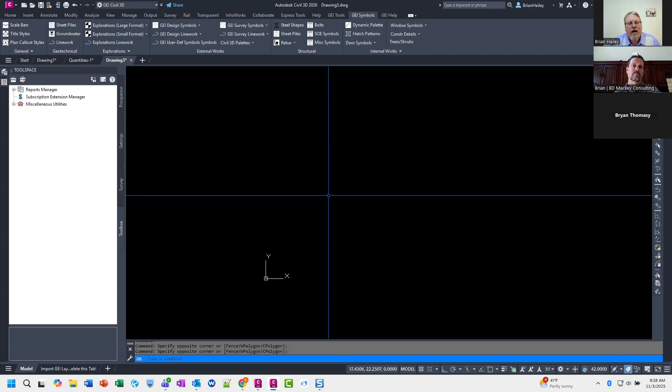If I go into my options, this is just a normal drawing, you can see we have our support files. If I come into this drawing here, which is associated with a project up in ACC, a cloud-based project, it's just a copy of one of the tutorial files I put up in a project. If I go into my options here, you'll notice this current drawing is using project-aware settings. So what this does is say, no, I don't want to use those settings from your base CAD, I want to use these settings instead.

You can see there's support file search paths, trusted locations, templates, tool palettes, and authoring palette file locations. So if you have a project that needs specific things, you can put those into this location. Brian and I were just going over this together last week or the week before, and I don't like it. Well, for us here at GEI, I don't like it, and I'll explain why. I think it's a great idea, but I'll talk about some issues I have with it.

If I come down here, you can see those classic AutoCAD settings. These are the settings you have just from regular AutoCAD, and these are the project-specific settings. I'll show you how to set this up for a project if you want, and I'll also show you how to get rid of it for a project you don't want it in, if you accidentally set it up.

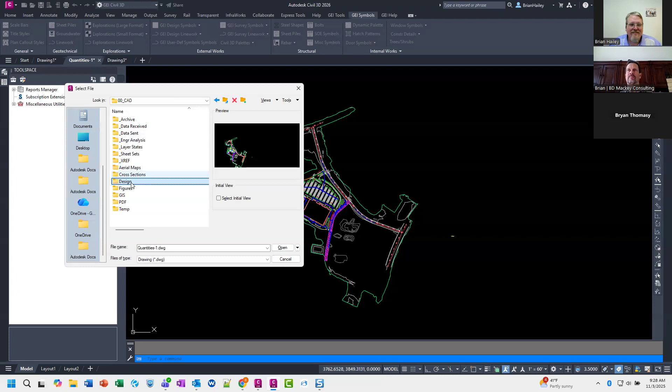That's why there's three Brians, because we will never have a full disagreement, right? It'll always be 2 against 1 in our brains.

So this particular project does not have the project aware settings, at least I don't think it does. This is the first time I've actually gotten into this one. But if we go into our options here, you can see project settings are available for this. And you will only see this option if the file is saved up in ACC.

All right, so if I come back over to this drawing, which is just drawing number 3, and I go into my options, you'll see that that is not available here. So that's why I'm thinking the files have to be up in ACC. But I'm not 100% positive.

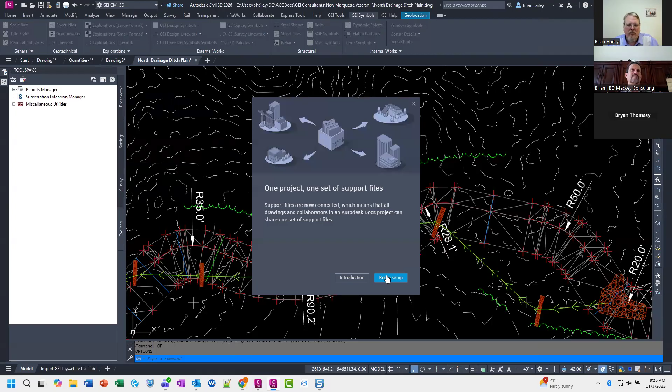All right. So I'm not going to do it for this project, but basically the process you would do, you would click on the setup. So I'd click setup, and then you would just walk through a couple of things. You begin setup, click OK a couple of times, and then you'll end up with the project aware settings. I just canceled out of that. What this does is it will add this Autodesk support folder underneath your project files in the project.

And if I go into this, you'll notice there's this JSON here. Let me go ahead and open up that JSON. You can be guaranteed I'm going to play with that. Like I said, I'm surprised you're not currently playing with that, Thomasy.

All right. And this is all it is. It's really, really simple. It's just those paths that I've put in there. And so what you can do is you can have this folder that has this JSON in your template in ACC. So when you create a new project, it will have this JSON already in there. It'll have this Autodesk support folder already in there. And that's all you need to do. And now this is a project aware project, and you're off to the races.

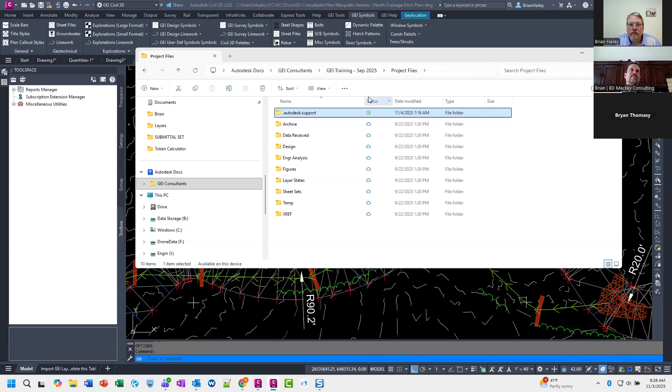Well, what if my project aware project requires standards that are company-wide standards? Yeah, so that's what I did here. So if I come back over here, in my options, under my support file search path, I've added in my company standard locations. You notice these are pointing to my C drive. Yeah, that's the scary part. Okay, never mind, I was thinking of something different. So this is where we keep all of our standards. So I've added those as a search path.

For example, if I come over here to drawing 3, one of my options here, these are just those paths that I manually put into that project. They're now a part of the JSON. And then when I create a new project with this JSON, it'll be there. And I'm going to test this real quick. Actually, this would be better because then it could facilitate having all of your standards on ACC.

Right. Would it be able to use the bridge concept to bridge it to another, so that way you could have a project just called company standards and then manipulate from there? If you want to do that, you could just browse to it. Right, but I think what Thomasy's saying is if you bridged that folder to a company standard folder, and then you wanted to make a change, you make a change there, and it globally goes to every project. You don't have to do that, is my point. When I go into my options, I can say, hey, I want to add a location. And then I can just browse to that other project. I don't need to bridge anything.

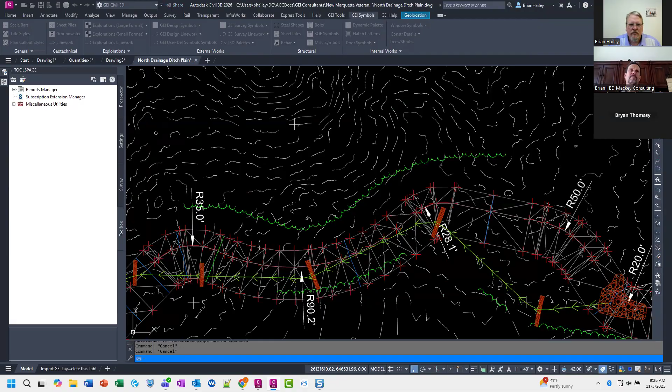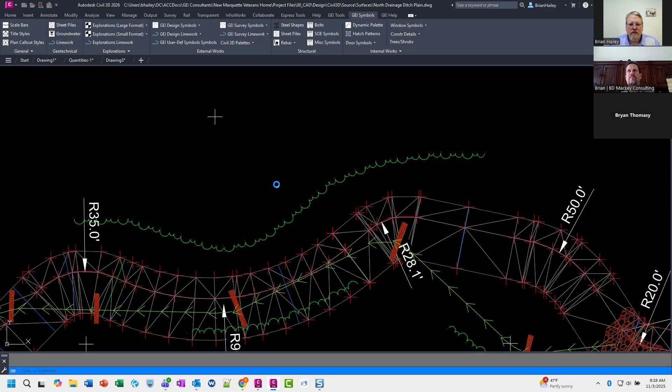Living life on the edge, doing testing in production. And so now if I come over here, I think I'll probably have to reopen this drawing. And this simulates creating a new project using a project template in ACC. And we'll see what happens here.

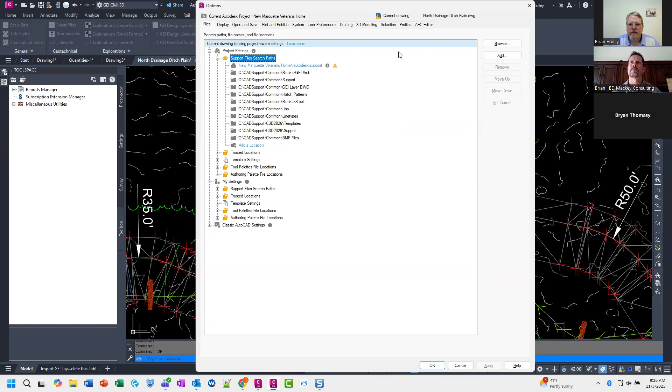So if I go into my options, you see it is using project aware settings and it has those paths in it. Right, so you can have these paths pre-populated in your project template in ACC. So when you create your project, it comes preloaded with these. Now, just to be on the safe side, I'm going to go delete that.

And so if you accidentally enable the project aware settings and you want to get rid of them, you can just go delete that folder. I'm assuming this is still going to read that way. Yeah. We'll delete everywhere. And then we'll close it and reopen it again. I don't know if you have to do this or not, but I'm doing it anyways.

And then if I go back into my options, you can see it's no longer using the project aware settings because I deleted that folder out. So that's kind of what I wanted to show y'all. Is it the end all be all? No. Again, this does not work for us currently.

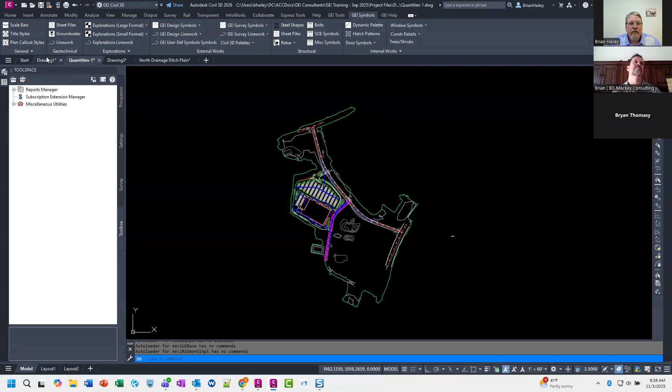And the reason is because when we switch to different tool palettes, I'm switching the paths of the tool palette. So let me come over here to drawing one. I'll show you how we're doing this. So I've got my GEI symbols tab up here, and these buttons just allow me to see things on the tool palette. So if I go to the SiteWork symbols, I can see my SiteWork symbols over here in my tool palette.

If I go to the sheet piles, I can see my sheet piles over here in the tool palettes. And what these buttons do is they actually change the path of my tool palettes. So it changes this path in my options. And so since this is no longer being used in a project aware settings, there's nothing to change. So if I come over here to my quantities one drawing, right, this is part of a project.

So if I come up to my sheet piles, oh, look, there's my sheet piles. If I come over here to my design symbols, SiteWork symbols, oh, look, there's my sheet piles. If I come over here to my bolts, oh, look, there's my sheet piles, because it's trying to change this down here. Where's my tool palettes? It's not even listed down here. So it's trying to change the tool palettes down here, and it can't. My tool palettes are controlled up here.

And so this is the reason that I can't enable this for our company yet. There's got to be something else going on. Here's what I would love to see it do. What I would love to see is for all of my settings from any other drawing to be listed down here. And then these project settings just add additional paths, right?

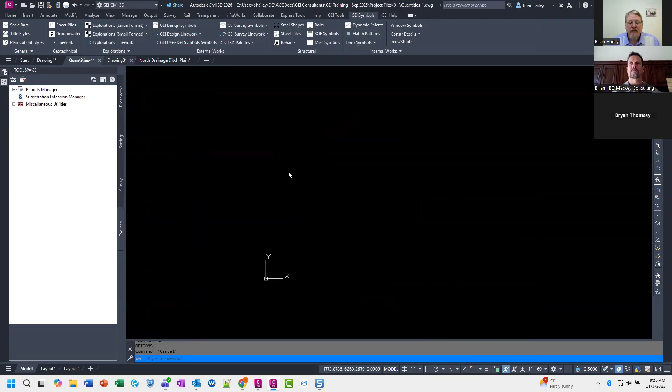Right. So like I said, here I am in a project aware setting. If I go into my options, I don't have those settings down here any longer, but if I go into a drawing that is not project aware, and I go into my options, it just uses my regular support file search path. Right, this north drainage ditch, I made it project aware and then I got rid of the project aware.

So if I come into here now, and I go into my options, again, you'll see that I have my normal support paths based off of my system, based off of my profile. So hopefully that answered the question, Matt.

So the question I have is, who's the first person going to be like, "Ooh, cool! What does this new thing do?" And they turn it on for everybody and break it. Yeah. So is there a way to make that user permissions? No, you can't do this, you dummies. I think you have to be a project admin to be able to do that in ACC for that project, but I'm not 100% positive on that.

Yeah, Tom said only project admin can make project aware, and Adam confirmed that. Okay. So not anybody in the project can do it. Only people that have permissions can. So yeah, when I first saw the project aware settings, I was like, oh, this is really cool. This is going to be great. And it just doesn't work for us yet. If it wasn't for the tool palette piece, I think it probably would. But we do tool palettes differently than most other folks do.

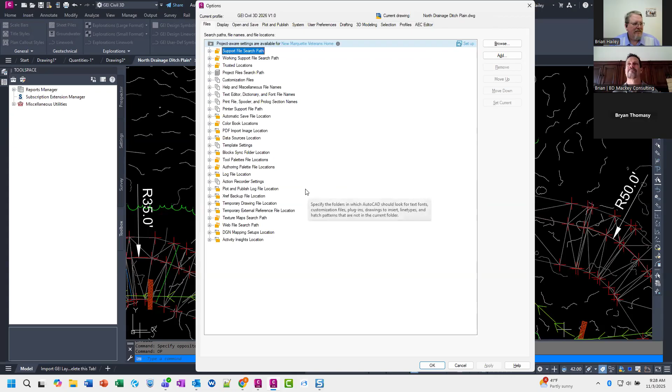And so Max said the way to keep it unaware is delete that folder off of ACC. Is that the official term, unaware? How do we keep it unaware? Don't hit the button. Well, as I said, only admins can hit the button anyway. So as far as I know, this is always going to be here for a project and for a file that's in ACC. Tom said others can click the button, but it's just more of a, hey, here's what it is, talk to your admin about that. And Kyle puts in the chat, as though an admin would be aware.

So that's the project aware settings. I thought it was interesting. This is something I've been learning about a lot recently. Any other thoughts on the project aware settings before we move on? As of now, you have them all covered. Tom did say the Autodesk support files and folders can also be put into that template. Yeah, and that's part of that JSON. So it doesn't just have to be the local folders. It could also be folders that are up on the project specific. But like I said, for us, it's not working because of the tool palettes.

You need to add a DoorDash button on there. So if somebody clicks the wrong button, it automatically orders coffee and delivers it to your office, and charges whatever credit card they have saved on their computer. This is what you get for clicking where you weren't supposed to. That's right. How dare you be curious? Alrighty, I think that's it for that topic.

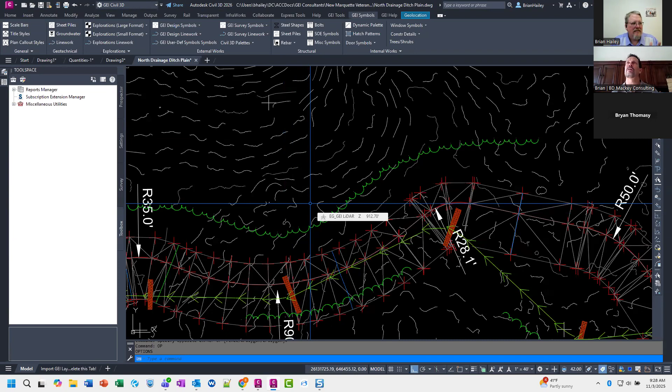So a question came up from Sean. Can you run a vehicle tracking for a vehicle and show us how to have it plot in both black and white and color? Interesting. Okay, for sure I can. So here's a project. This would be perfect for this. How come I don't see my vehicle tracking up here? Because you don't have it up there. It should be displaying. Let me try changing this to my custom one. There it is.

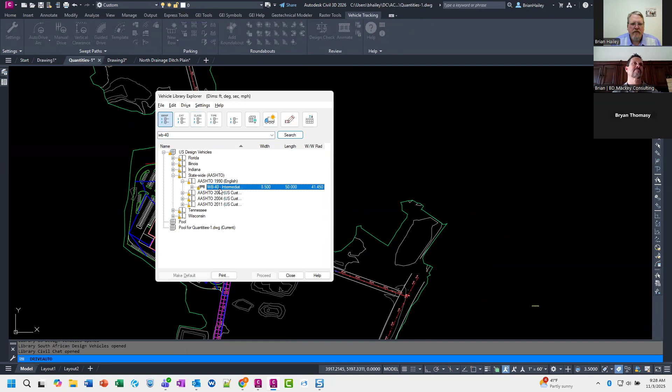Okay, so I'll do a quick auto drive, and we'll do a WB40. Statewide AASHTO, WB40. So it's just a semi truck. You don't pick something fun out like a tank or something? Oftentimes I will. 747. There's some fun ones in here, that's for sure.

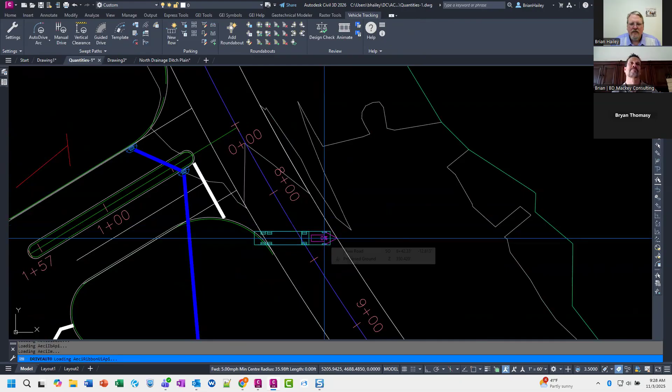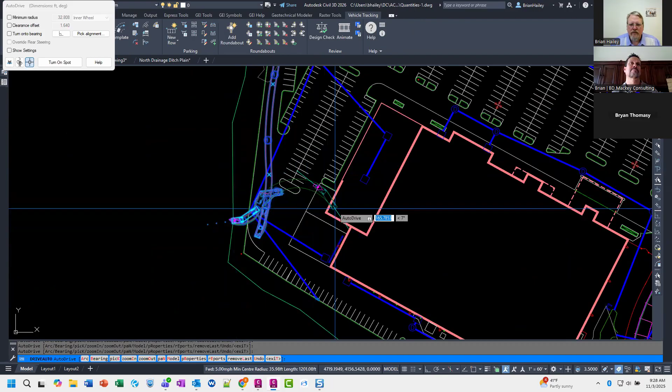Okay, we'll have it start here and have it make this left turn. So I'll come up here, down here, through here, around to the loading docks over here. I'll have it back up to here, pull it forward up to here. I know it's going out of bounds. And then I'll have it dock in the building now. Okay, perfect. I am not a truck driver. When I go to plot this, let me just move this so it's kind of out of the way.

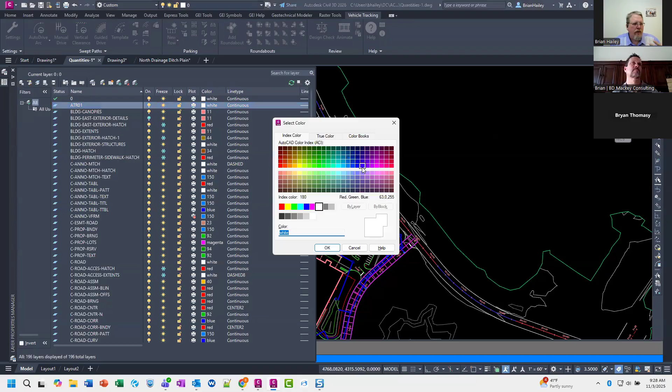So as far as plotting goes, I'll explode this, and what you'll see is these all go on different layers, ATR01. So you would just set these layers up to plot however you want them to plot. So if I go into my layers, that ATR01, this particular drawing is set up to plot in color. So you would just choose the appropriate color that you want it to plot. It's just line work, so you just plot it however you want. If I did this in one of our default drawings here, this one is set up to plot with STB. Low boy.

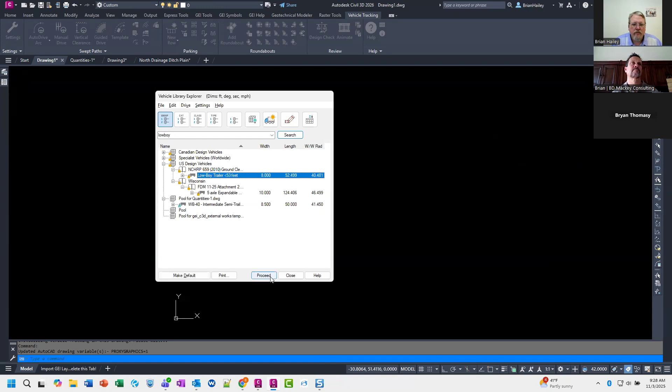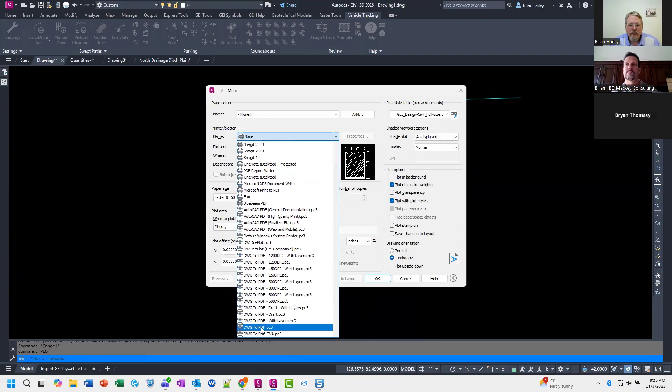North American refuse. I thought it was a low boy. That one. We'll try this one. This one's a little bit funner. Maybe it's not. Anyways, I'll just go ahead and throw something in here. And I'll plot this real quick. That's fine. We'll use a DWG to PDF. Apply and do a preview.

And you see right now this one is plotting in color. The reason it's plotting in color is this is an STB based drawing. And if I go into the layers, you can see this layer is the plot style not being displayed. It's set to normal, right? So I would set an appropriate plot style.

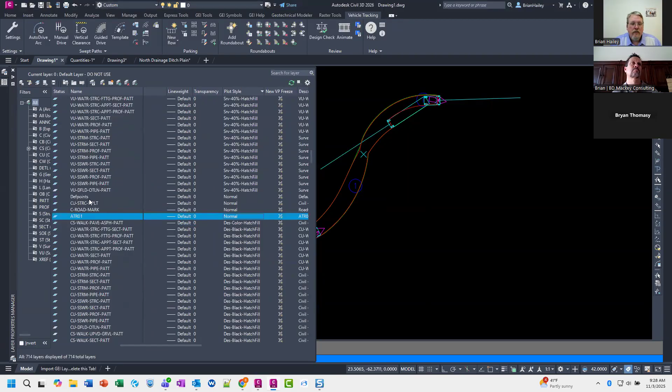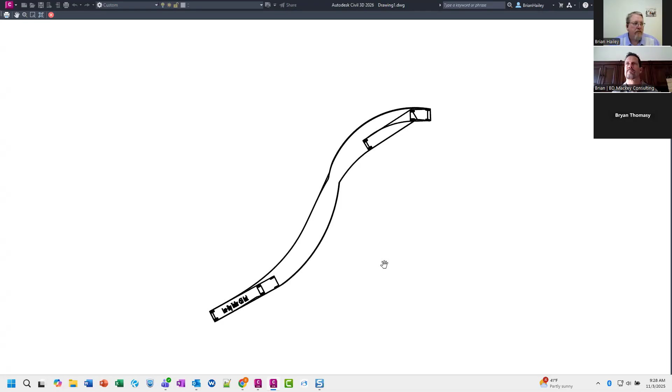Let's see what else we have that's normal. Is that the only? Maybe that's the only one. So I'll set that to Des Black 12. And now when I plot, you can see it's plotting black. So it's just the same as any other AutoCAD line work. It's just this line work goes on to a specific layer. You can just set that layer up to plot however you want.

If you're using a CTB, you have to go into the settings to change the colors of those to plot the way you want them to. I believe that is under the settings here, somewhere in here.

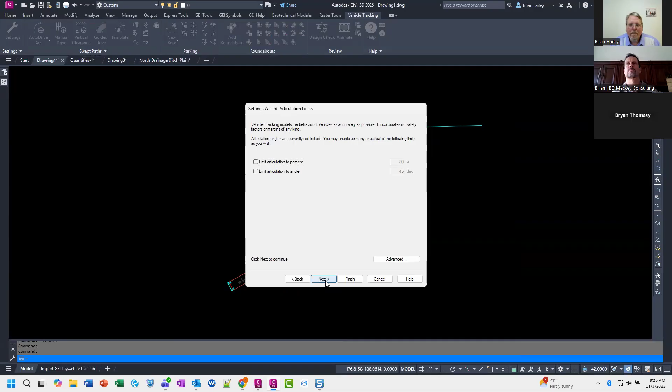Yeah, and Robert says they use a black and white CTB to add color. We just change the entity or layer to an RGB value that does not match the standard colors, and that will plot in color. Yeah, so it's just like anything else in AutoCAD. You just got to figure out where it's setting the colors.

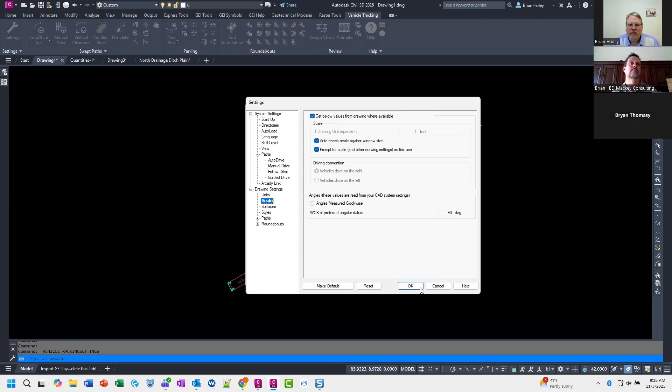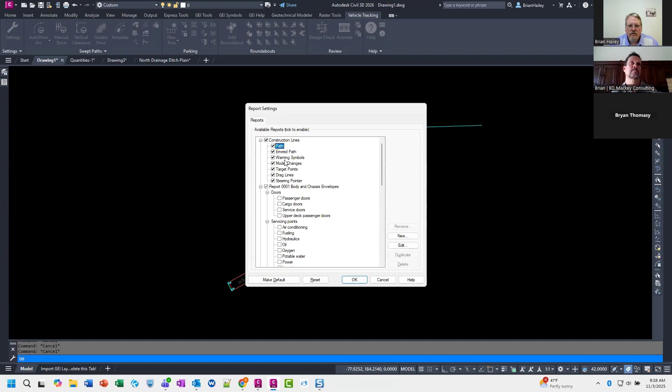I just don't remember where that is in vehicle tracking. It's probably one of these buttons here. Yeah, I don't remember exactly what it is. Anyways, that's the idea. It's just AutoCAD line work. Set it up to plot the way you would anything else. Report wizard. Which one's report wizard? Yeah, it's here somewhere. You just have to find it.

Okay, what else we got? So Christopher asks, have you guys ever adapted pipe networks to be used in a non-pipe function with custom pipe structure libraries? I love the dynamic labeling the pipe networks can provide, including their access to PSETs, and looking to replace AutoCAD blocks for point features like fence crossings. I'm not sure what a PSET is.

Any idea on that one, Brian? Can you expand on that one a little bit? Sorry, I was away for a while. So Christopher's question, you can see the questions, right? Yes, I can. Okay. So you just said PSETs and that's property sets. Okay. We haven't done anything like that. So he's talking about using them for like fences. Interesting.

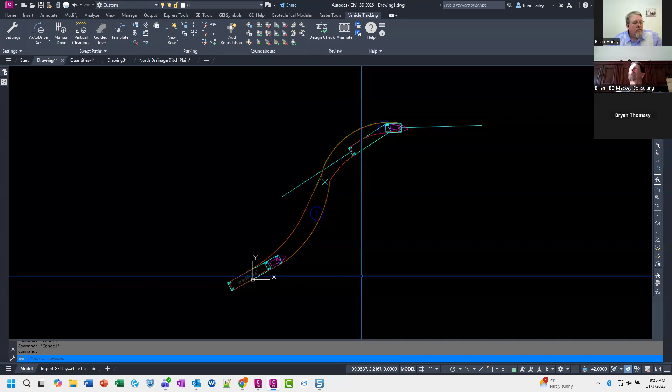No, that's not something I've ever done. But now I'm pretty curious. We use our pipes for pipes. I've seen people use corridors for pipes instead of pipes, but that's kind of going the opposite direction of what you're asking. Yeah, I don't know. Has anybody? So let's reach out to everybody else. Is anybody else in the chat using pipe networks for things other than pipes? And if you are, what are some examples of what you're doing? I'd love to hear.

I'll use them for points actually. If I want to set a point table that's got not just northing and eastings, but also station and offset to an alignment, I can use pipe structures as those points and output a table that has that. Because I don't know why somebody needs to have a station and offset to a point that also has a northing and easting. But I guess if they haven't nailed their center line alignment down with northing and eastings or bearings and whatnot, then they could use that method.

Yeah, that's true. Kyle says, yeah, users make them non-visible on plan, but still use the labels. Okay, so I think in Kyle's example, they're still using the pipe networks as pipes. They're just not using them to display the pipes. They're using 2D line work to display the pipes. They're using the network for labeling. All right, that's interesting.

So in the chat, Adam put: I've thought about using them as objects in my design base, signs, ramps, bike racks, etc., that I need to label, so I can use the labeling function in the sheet to keep the labels attached to the design as they move. Okay. Isn't that the idea of points? Let me bring that chat over so everybody can see it. Honestly, you could, I think, yeah, that would be the concept of a point.

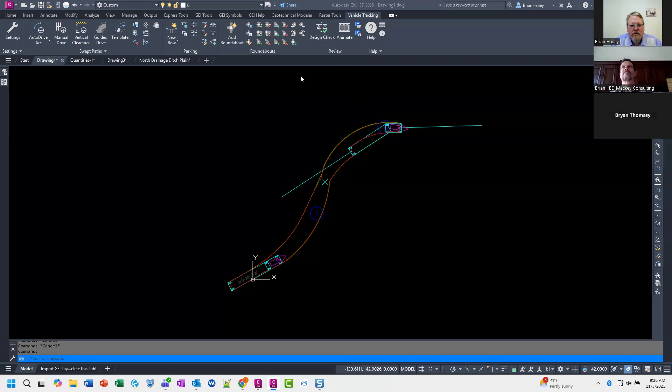Robert had a question. Is there a way to add a reference surface to all existing pipe network structures in one command in Civil 3D, instead of having to select one structure, going to structure properties and then changing the reference surface? That's a great question. Let's see if we can figure out a way to do that. Don't know of a way to do it off the top of my head. My command is, hey, intern.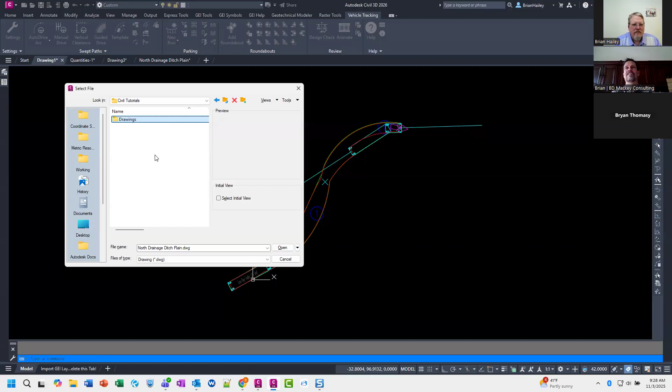There's one command. You got one suggestion for Toolspace and one suggestion for Project Explorer. Yeah, I was gonna look at both of those options. I think Project Explorer has that ability, but I think it just does it per pipe run. I don't think it looks at the entire network at one shot.

I guess if there was a game show and there was a big shiny button, you two would have hit it at the same time, right? Yeah, Tom typed in both. No, Tom was typing in both of the answers. That's why he wasn't there as fast as everybody. Okay, so let's take a look at the... My God. That's awesome.

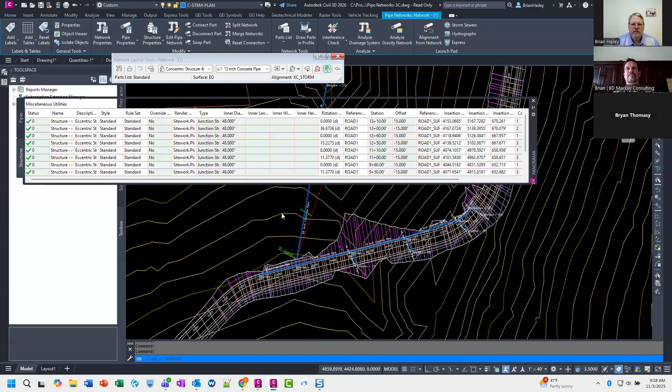At the edit pipe networks. No. Why is it not bringing up? It was on my other screen. All right, and then we have the Pipe Networks Vista. So this is one place that we might be able to change it. I think this should work. So this won't necessarily do it for all structures in the drawing, but it'll do it for all structures in the network. All right, so we're on the structures tab here on the side.

Here is the reference surface. So I can select the one, shift select the very last one, and when I click in one of them, you can see I can change it for that specific structure, but it doesn't change it for all of them, which is what you want. However, there's a cool trick. There's a couple of ways of doing this. If I select them all, if I right click on the column heading and then choose edit, I can then change them all at the same time.

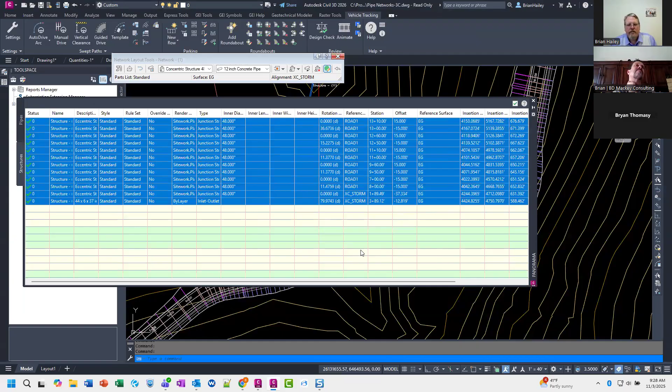Or if I select the first one, shift select the last one, keep holding down the shift key, and then click in here, I can do the same thing. So this is the way I would do it. But again, this doesn't do all the structures in the drawing, it just does all the structures for the network. And you can pick and choose. So I want this one, this one, this one. So I'm just using my control key to select the ones I want. Right click the column heading, edit, and I can change all of those to another one.

So Robert, I hope that gets you what you need. We can explore the other methods as well. Yeah, Project Explorer and Prospector.

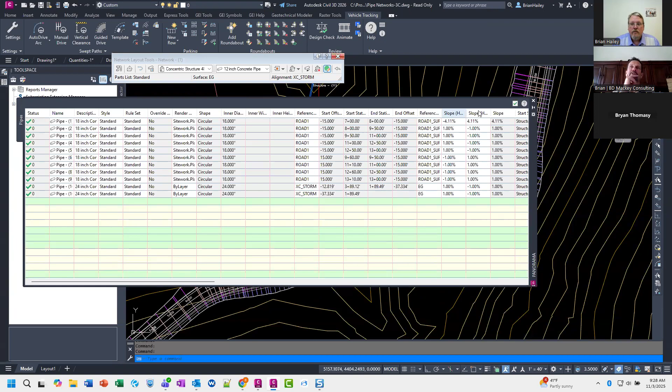So if we go to the Prospector, pipe network, networks, network one, structures. So we're talking about this little itty bitty tiny little area down here. Same concept. I can scroll over to the right. It's over where, no, did I go too far? There it is, reference. And I can pick the ones that, well, wait, which ones were they again? Let me just make this as big as I made the other one.

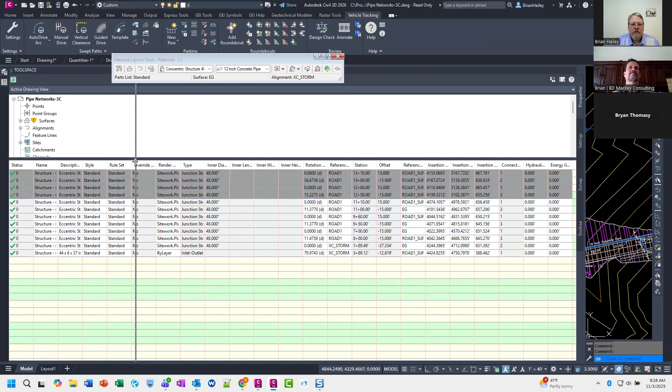And there we go, which is pretty much the same as just going through this little button here, right? You can do the same thing, right click on the column heading, edit, and then change them all there. Same concept. All right, so that's the same idea as going through the Pipe Networks Vista.

And then if we take this into Project Explorer, pipe networks, structures... oh, that one, oops, stupid Windows key. That one, and that one. Reference surface.

It's only letting me do one at a time. Doesn't even let me change it. So I'm not seeing a way to do multiple in Project Explorer.

Set reference surfaces. So I just right clicked, selected them, right click, set reference surfaces. And then I can change those all to, say, the corridor surface. So that's how you would do it through Project Explorer.

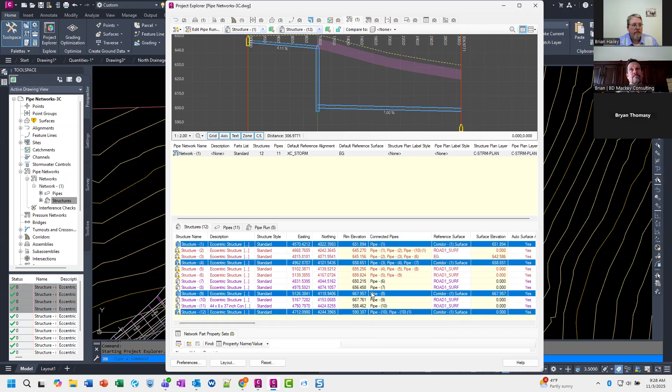So multiple different ways of achieving the same thing. I would just go through the Pipe Networks Vista personally. And Adam says you can use the Red Transit Pipe Networks productivity tools as well, assuming you want to go purchase that add-in. Red Transit makes some good stuff, that's for sure.

That is technically all the questions we have. That's it. I went too fast, should have talked slower. I did do my typical and go look at what updates there were since last civil chat. And was there anything new, Brian? You got me on pins and needles here.

There was an AutoCAD drawing cleanup utility for 26. There was, I don't know what GENIO import and export extensions is? Genio? I don't remember what that is. Yeah, that came out for Civil 3D, I think that's Europe primarily, if I remember correctly. I could be totally wrong on that, though. That came out in 26, and then also DWG integrity and migration tools for Civil 3D.

And then, of course, for me, the day after I installed all the software on my new laptop, Navisworks came out with an update, Navis 26. Of course, and I thought I saw one earlier, yeah. And then AutoCAD MEP 23 has an update. That's it, I thought I saw some for like map or something. Maybe not, yeah, map, sorry. AutoCAD Map 3D has an update for 26.

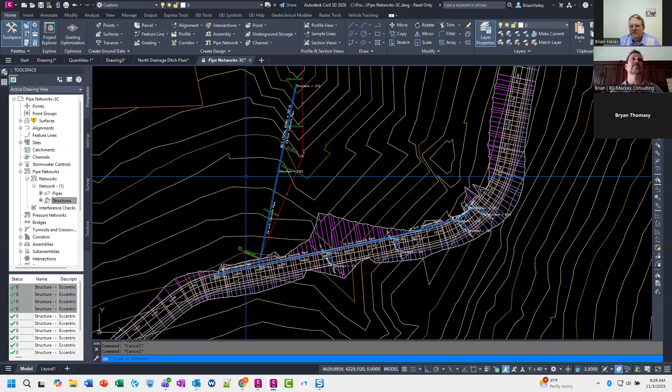No, I'm going to be honest with you. I think that is very great at mandating, because what will end up happening is we will set our projects up with that, and when a person goes to open a drawing there, it reverts their project settings whether they like it or not. I see that really lends a lot of power, especially to the CAD management realm, because no matter who opens that drawing, will automatically have those project settings put in there for them, because they're going to be reading from that file.

And when it reads from it, and it's on ACC, you can assign permissions to that folder location, so that way they can't make changes to that location. Correct. Now, the big question is maybe if they don't have their mappings proper, or what if a person gets into it that doesn't have CAD on their machine, or that doesn't have your standards on the machine? Right, if you bring a sub-consultant into the project, and they don't have these same mappings, yeah, I was thinking the same thing. Just since we've been in civil chat here, and that's where you would have to put your standards on each project if you're going to have sub-consultants utilizing this on ACC.

I think it's got a lot of potential. Yeah, I really do.

We got a question from Tom. I'm about to use the Autodesk migration tools. We've got a client that is moving 30 years of data over to ACC, and I'll let you know next month how it goes.

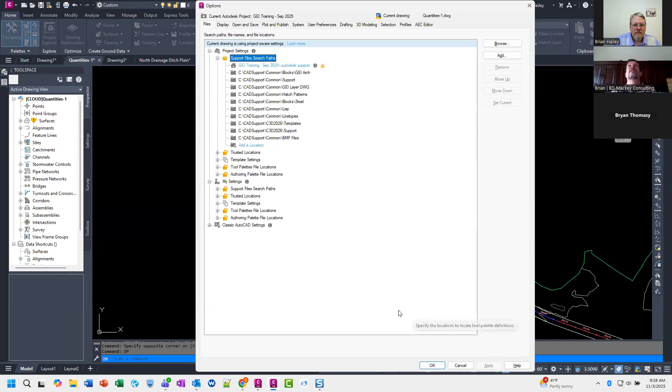Yes, you can. So a couple of people ask, can those files be deleted? I go through and delete those files all the time, to tell you the truth. And the only time I've had issues is when Autodesk screws up their stupid service pack updates, and sometimes it needs to find the original installer INI folder. I know this is a big deal with Revit. If you've deleted that, it's like, crap, I can't find it. So you've got to go redump the INI file somewhere.

Somebody else is saying, I just checked mine, mine's 70 gigs. I've been into that folder before, and I've only installed a few versions of software and I'm at 60 gigs. I've had that folder be 200 gigs before. At that point I start going in and finding anything greater than 6 months old and just deleting it, hoping it doesn't screw me on the update. If there is a service pack update, you just usually need to find the INI for that thing, and that's all it's looking for. But no, I've never had problems uninstalling software if I've deleted those folders, only dealing with updates occasionally. I didn't do it for quite a few years, and then around version 24 or 25, Revit started doing it again.

And again, there can be two folders in there. There's a WI folder, and the IM folder is for if somebody's using Autodesk Access. So it does understand which folder you came from and which folder you downloaded it from. Go to your IM folder, what's in the IM folder? I don't have one yet because I've done all of mine from the web installer. I didn't do anything from Access, so I'm not sure what's backed up there.

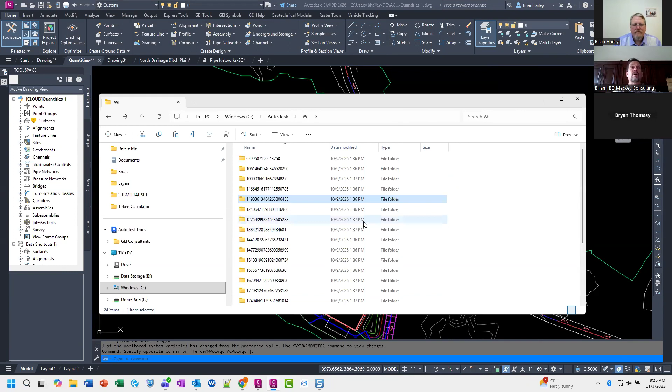Especially with the question originally about laptops, I see a lot of people buying only like 500 gig hard drives. And that's the other big thing too. So if you got 80 to 100 gigs in there, and then you go to your cache folder as well. If you look at the Autodesk cache folder, if you start working on ACC, it goes to your cache folder on the C drive. So all of your project data gets cached there, and that can really, really take up a lot of space for you too.

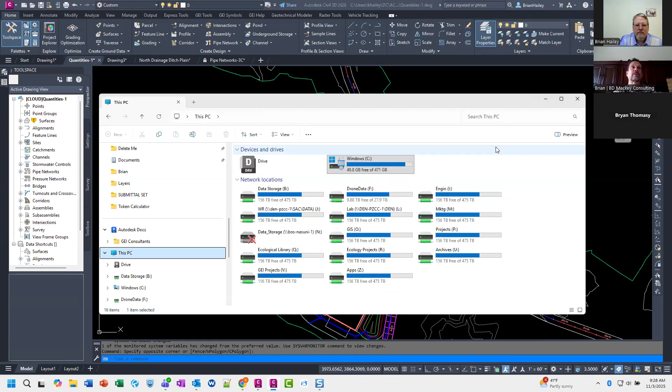But your cache, yeah. I'm due to get a new laptop here pretty soon, this one's quite a few years old. And you can see I only had 500 gigs on this one, and I'm almost out of space. I don't know where the cache is located for Civil 3D. I only know where it's located for Revit. Probably under C temp or the temp folder. No, so the cache for Revit is under users, app data local, and then Autodesk.

What goes into the cache folder? For the Revit world, it's the project you're on, and if there's 10 files linked in, it also downloads those 10 linked files and puts them into the cache folder. And then if you open up any one of those linked files as a separate file, it then copies that to the parent folder. So you can literally have duplicates of everything. And for a lot of my clients, who end up having like 1 gig files for everybody, you can have 15, 20, 30 gigs in a single project folder.

So I always just like to bring that up. Again, I don't know how it works for other people, but I know how it works for me on the Revit side. Yeah, Kyle checked his folder. It's at 71 gigabytes. Yeah, love it. It's real quick and easy to fill up. And again, you guys have IT, so IT is probably saying, "Hey, go get rid of all those files." But if you don't have anybody, yeah, it's kind of getting in there.

I mean, my new laptop, I have two 4 gig hard drives on it. You have what? Two 4 gig hard drives. So I have 8 gigabytes of hard drive space. Okay. That doesn't seem like much, unless I'm misunderstanding something. Oh, sorry, I meant 800 gigs, two 400 gigs. Not 4 TB. No, that was too pricey. So you don't even have a total of 1 TB. No, I got 800 gig. And I don't have a server, so all of my stuff gets stored on my computer. But I don't download music and photos. Alright. I've got two 2 TB hard drives. Yeah, I just have 500 gigs.